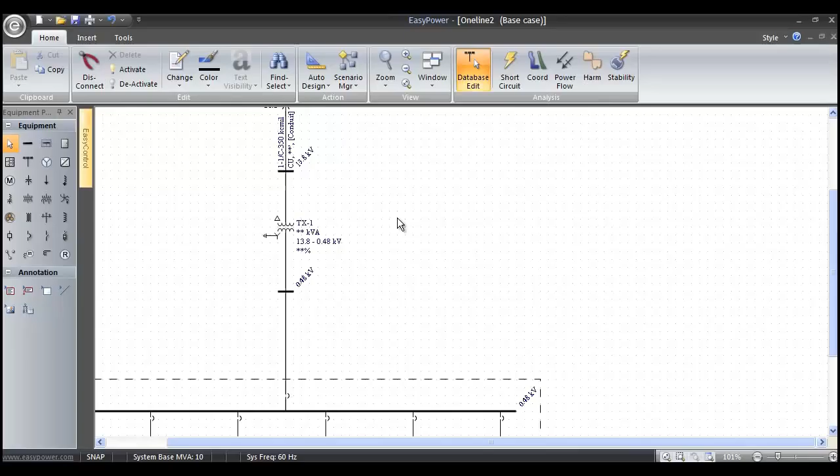So the first thing we want to do when we want to enter data into the one line is we're going to left mouse double click on the equipment. When we created the one line, everything was just a single left mouse click. Now we're going to left mouse double click. That brings up a dialog box for the equipment.

Every dialog box in EasyPower starts off with the Specifications tab. That's the tab that describes the information that you would find on the nameplate of that equipment. So the type is going to tell us for this transformer whether it's oil, gas, silicone, dry type. The class rating is going to tell us whether it's OA, forced oil, air, forced air, and things like that. Temperature rise, we'll pick a standard 55-65. This is all on nameplate data.

Now, anytime that we have to have data that's mandatory, we're always going to flag the cell in red, either a red cell or a red dot. So in this case, we need to know what the transformer kVA rating is. So I'll type in 1000 kVA. Now, if I want to figure out what the forced, cooled, or overload rating is, it will calculate that for me if I filled out this information. So as you can see, it's really simple. All we need is the nameplate data.

Now, typically there's two tabs for most equipment that we need to fill out data for. The second tab for a transformer is the impedance data. So we need to know what that positive sequence impedance data is, and it's right on the nameplate. It's probably going to be something like 5.75 or 6%.

Now, you're never going to find the zero sequence or the X over R ratio for a transformer on the nameplate. They just don't test each and every unit to that degree. So we typically provide a calculate button that will calculate the zero sequence based on a typical core type transformer design and the X over R ratio based on ANSI standards.

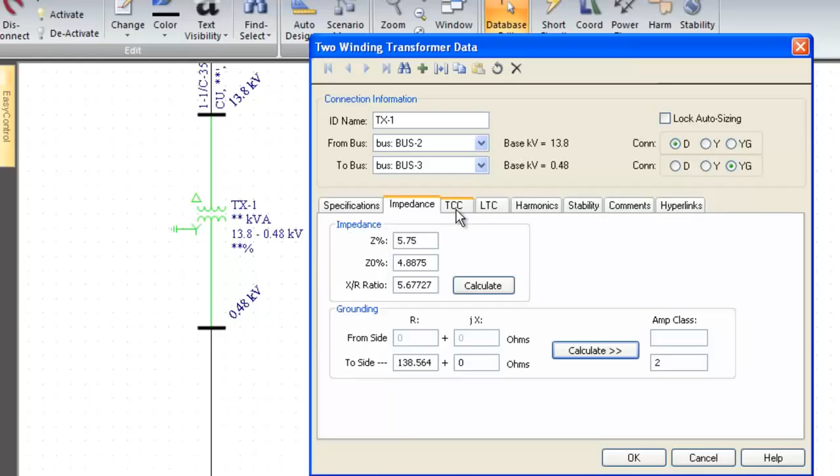Now, these other tabs are for more advanced studies, such as protective device coordination, load tap changers, harmonic stability, and things like that. More advanced than what you'd find in a short circuit or arc flash study. But let's go through them briefly just so you can see that they're not intimidating. We already have all the defaults necessary for the transformer damage curve, such as 100% withstand, plotting unbalanced derating, whether or not we use frequent or infrequent fault curves, the magnetizing inrush, and those types of things.

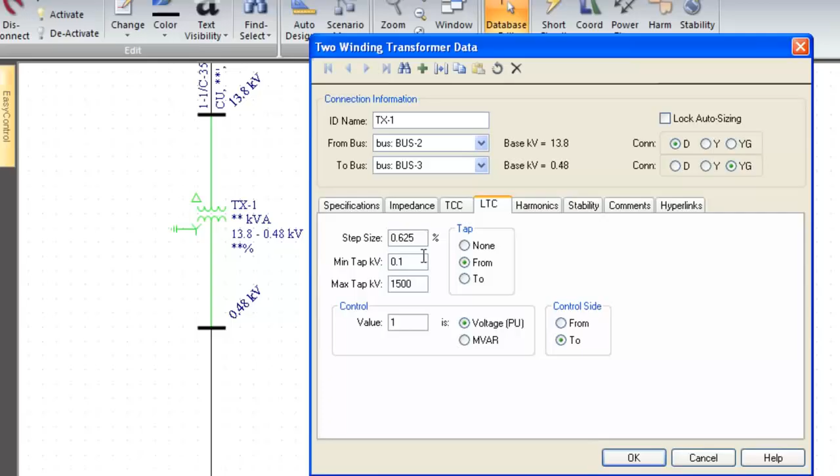Load tap changers, this just allows us, if we're doing a power flow study, to model the from or the to side with an LTC, controlling the from or the to side. We can control voltage or megavar flow through the transformer, any step size, any tap range. If we were modeling harmonics and doing a harmonic study, we could model the eddy current losses and resistance factor. If we were doing a stability study, we could model the magnetizing inrush for the transformer.

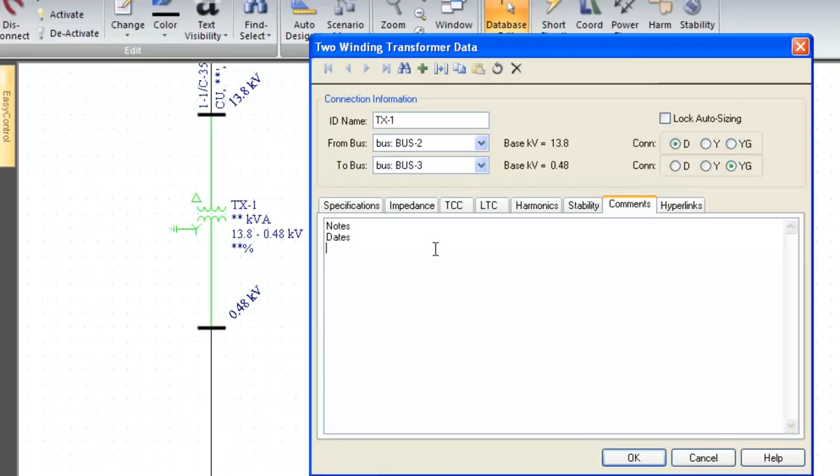Comments, this is just if we want to put notes, dates, maintenance info, things like that. Different facilities may be interested in the hyperlinks command, so we can actually add documents to the one line. We can browse our hard drive and maybe add a file such as a work permit or safety practices.

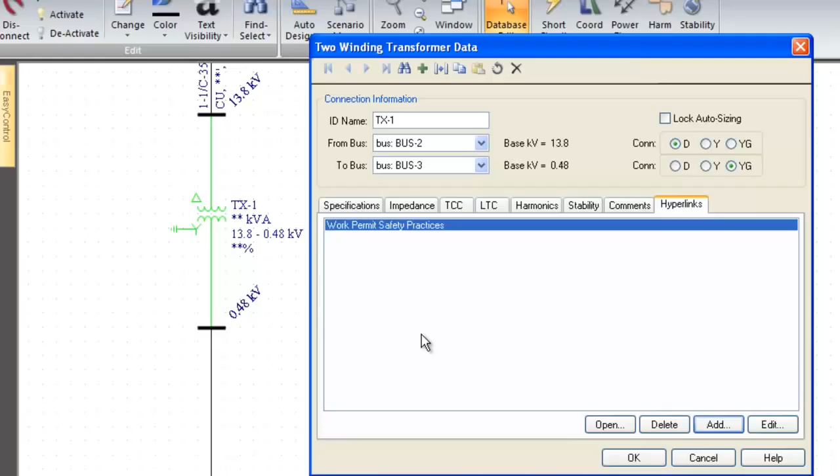Now, once we do that, anybody can come in to the program, click on this transformer, and access the work permit or safety practices or oil transformer test reports or any document associated with that transformer. So it provides a great one-stop shopping place to find everything we need to know about that transformer, including instruction manuals. So when I say OK, now here's our transformer.

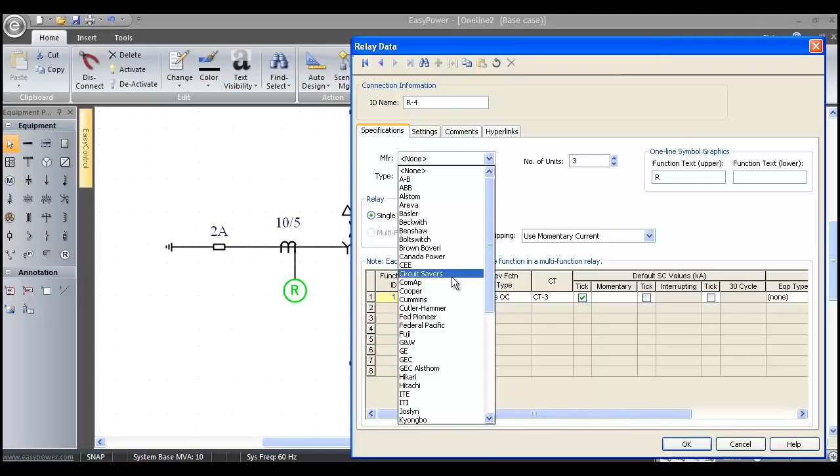I can actually grab a CT and a relay, and so now we can make a high resistance grounding alarm system. I can double click on this CT, make it, say, a 10 to 5 unit, 1 CT. We'll double click on this relay and we'll pick, say, a General Electric.

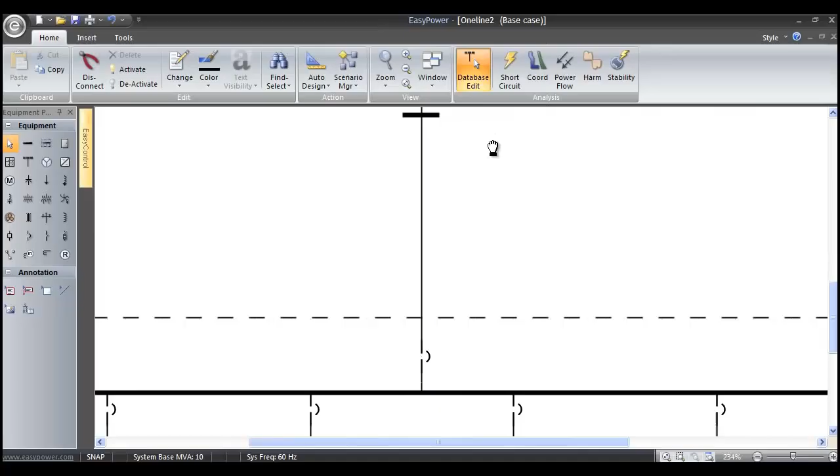And we'll pick, say, an old IAC 51 unit, and this will be 1 unit, and it will be a 51 alarm. But when I say OK, now I've got my high resistance grounding system for this transformer. Let's press our little roller. I'm going to move the page up to the secondary main breaker of this switchgear lineup. I'm going to left mouse double click on it, and you can see here is the data entry for this

breaker. Now with low voltage breakers, we break it up into the NEMA UL categories of molded case, insulated case, and low voltage power circuit breakers. In this case we've picked low voltage power circuit breakers, so if I select the manufacturer, it will actually tell us all the different manufacturers that make low voltage power circuit breakers, and this database goes clear back into the 1940s.

So if I pick something like a GE and then go to the breaker type, it will show me all the different low voltage power circuit breakers GE has ever made, from the 1940 A series, the 1950 ALs, the 1960 and 70 AKs, the 1980 and 90 AKRs, their new EntelliGuards and WavePros, their IEC M-PACTs. So let's say I pick an AKR series.

It will then give me all the different styles, and this is what I really care about, is the style of breaker. Here in this case, here's all the AKRUs. These are the fuse combination. AKRTs, the high capacity H's, the S's and the L's, they're all here. So if I pick something like an AKR50, watch what happens when I select it. All the manufacturer and types of the solid state trip device are going to change.

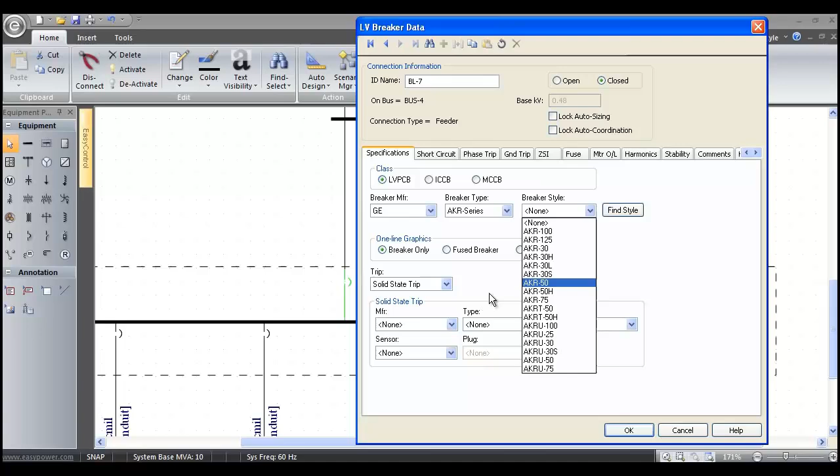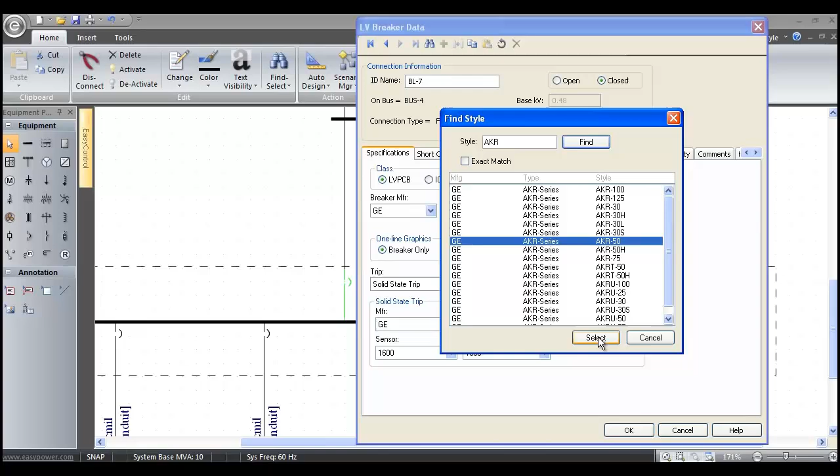You'll see that we've got this solid state trip device, GE MicroVersaTrip PM, low voltage power circuit breakers, the sensor. All I have to do is pick the sensor and the plug rating, and now we have our device. The next question is, would we really want to spend our time filling all that out? Well, the answer is no. So in practical use, what you do is you hit Find Style and you type in AKR. It finds all the AKRs. You pick an AKR50, hit Select, and we're good to go.

Now, low voltage power circuit breakers, there's a lot of different tabs up here. We typically only use the first 3 for most studies, but we have a lot of different options in case you want to add other functionality. Short circuit, all we do is hit Calculate. That tells us that this breaker is rated for 50 kiloamps. Now the phase trip settings, that's showing us that once you put a sensor or a trip device in, we need to know what the settings are.

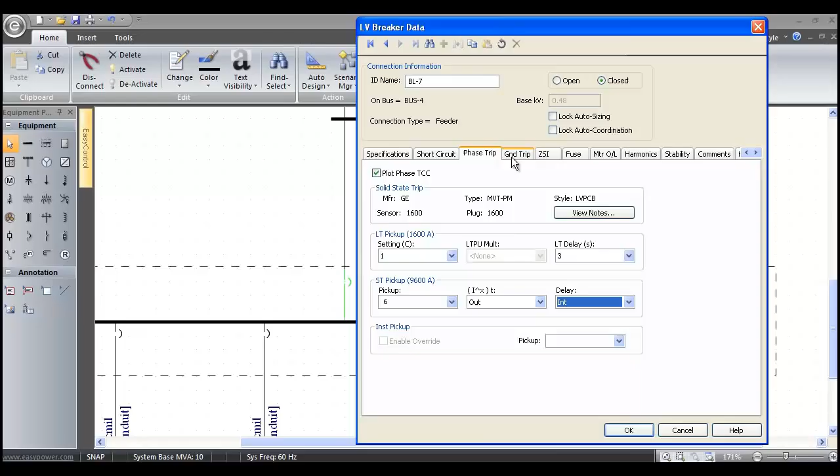Now if we were doing automated design, the automated design procedure would select all this for us, but now we're assuming that we're actually out collecting field data. So we'll put in the trip devices. Okay. Now if it has a ground trip, we just check plot ground TCC and we can put in the trip device. If it had zone selective interlocking, we would just check the ZSI box and we would put in our zone selective interlocking.

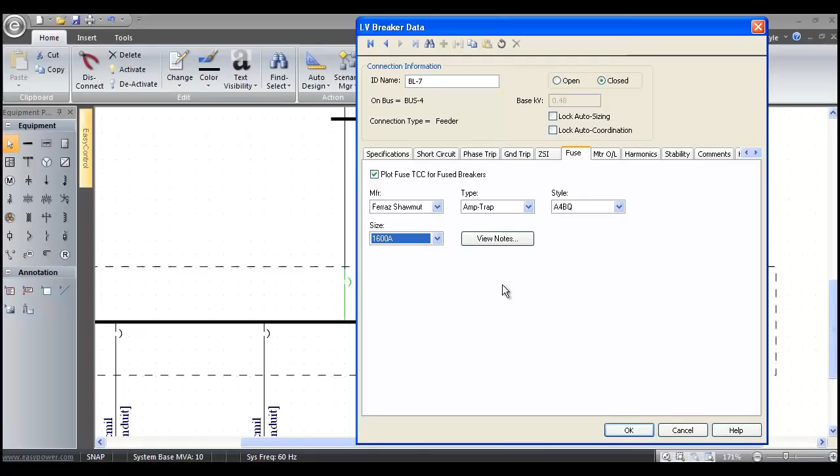If it has an integral fuse, such as an AKRU breaker, we'd check the fuse, tell it we want a Ferraz Shawmut Amp-Trap, A4BQ, 1600 amp, and now it will integrate the fuse in all our arc flash and protective device calculations. Same with motor overload. If this was a molded case breaker and we had a GE CR124Y fast fuse, it would automatically integrate that with the motor circuit protector or thermal magnetic breaker. So I'm going to say OK, and there's our unit.

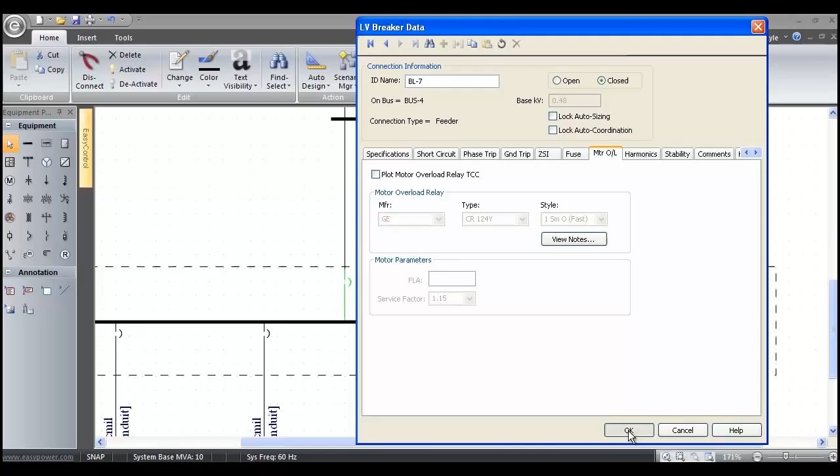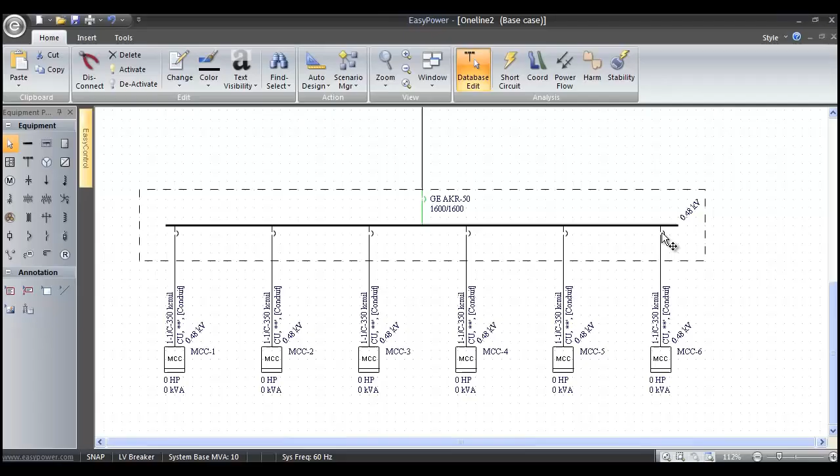Now obviously we don't want to go through that process for each and every breaker on here, and since most of these are going to be the same type of breaker, maybe just a little bit smaller, what we simply do is right mouse click, context sensitive menu, copy, our mouse stays in the middle of the screen, right mouse click, paste, and there's another AKR50. We probably need to make this an AKR30. It's probably a smaller feeder breaker, so we just change this to AKR30.

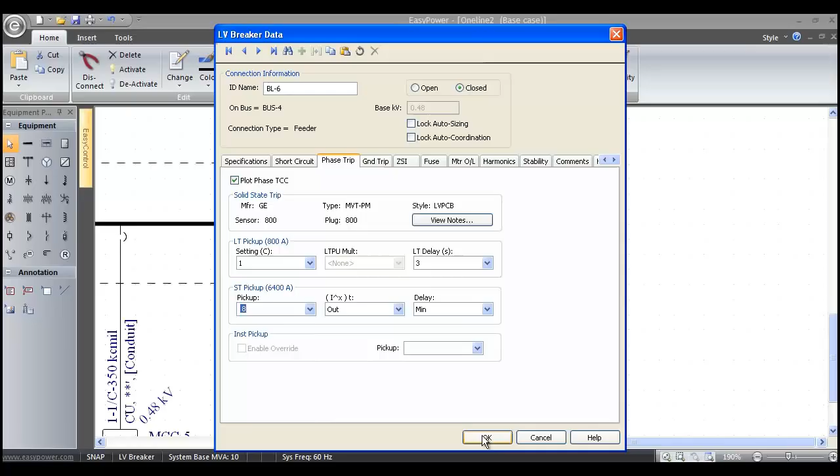We change our sensor to 800 amps, our plug to 800. Our short circuit rating changes. Our phase trip settings probably change slightly. And there's our unit. Now obviously we still don't want to do that for each one, so we just right mouse click copy, left mouse click press slide release, right mouse click paste, and there's an entire switchgear lineup in 2 mouse clicks.